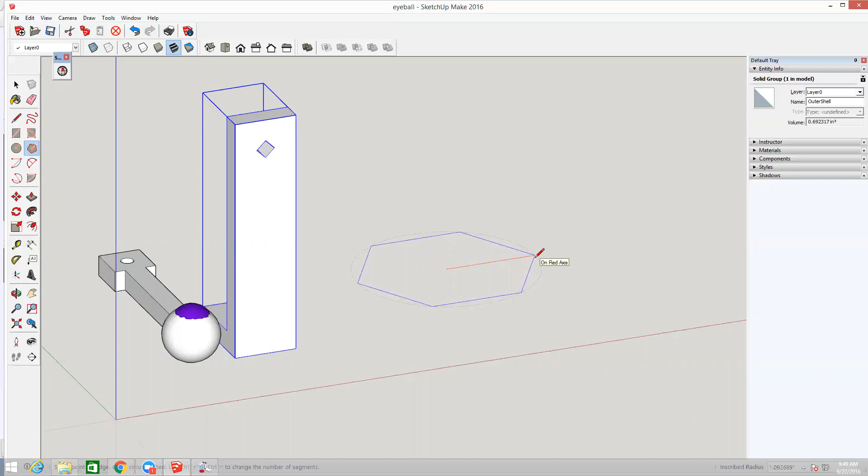And I'm going to raise it up with the push-pull tool, after I stop and let everyone get caught up again. P for push-pull tool.

And the little stub on the end of the eyeball is 1/4 of an inch high. So we're going to make this hexagon 1/4 of an inch high.

And if you're going to have this thing spinning on that shaft, we might as well make the hole right away. So I'm going to get the circle tool, type C on the keyboard to get the circle tool.

Brooks, did you give a measurement on how the radius of your... No. So that's something you'll need to do.

You want to get into that drawing for the thing that's spinning on a shaft and just see how much room you have. Measure it with the tape measure tool. And then come over here and figure out just how much room you got for this thing to rotate in.

And if you print it out and it's wrong, then you can just make a bracket that's a little taller.

Okay, so hole in the center, 0.078, and then push-pull tool.

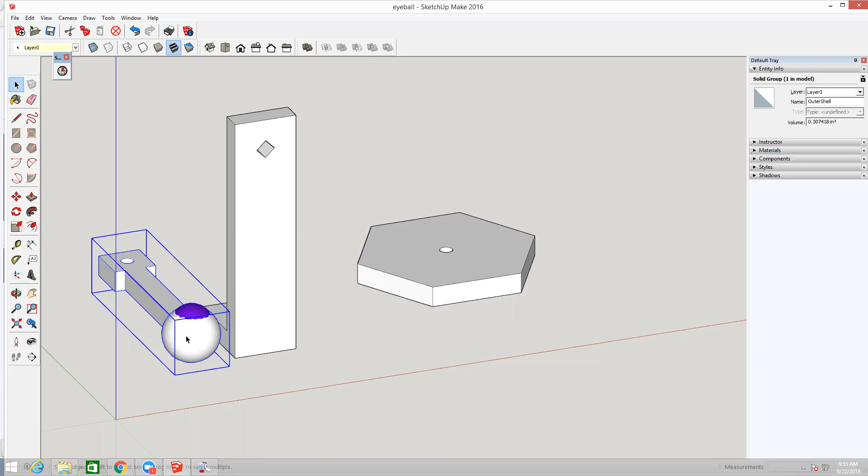So what I need to do next is download the file that has the eyeball in it. Open that file up, then copy the eyeball, and then get back into this drawing and paste it in here.

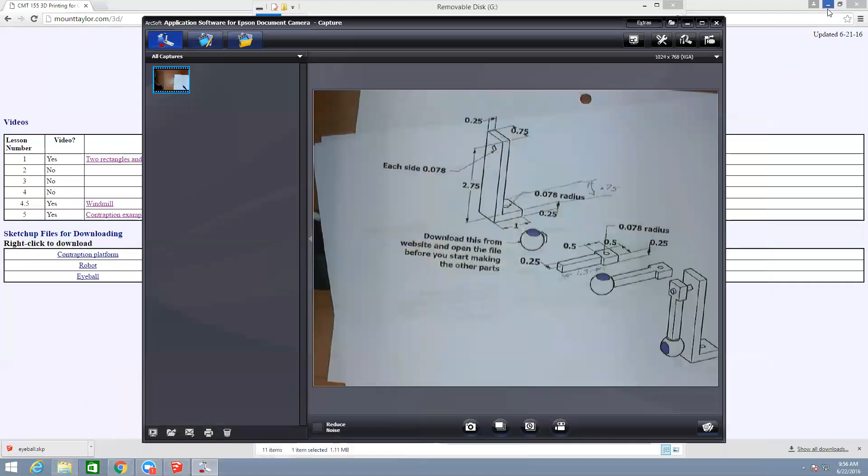So I'm going to get this out of our hair right now, and this too.

And next I'm going to click the SketchUp icon. Okay, we're opening another instance of SketchUp, so that we haven't thrown away the old drawing.

And I'm getting ahead of myself. I'll leave this open here. We are going to need this in a minute.

What I should have done was to go to the website for the eyeball. Well, you know, actually, we already have it on the removable drive, so I didn't need to go to the website.

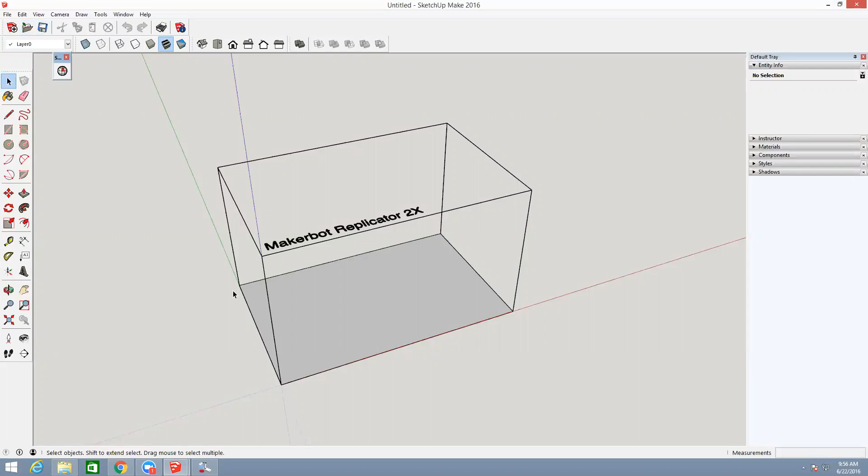I could have just gone to here and, well, let me go to the File Explorer down here. And here's the eyeball file that we downloaded earlier. I'm going to double click that, which will open it into SketchUp.

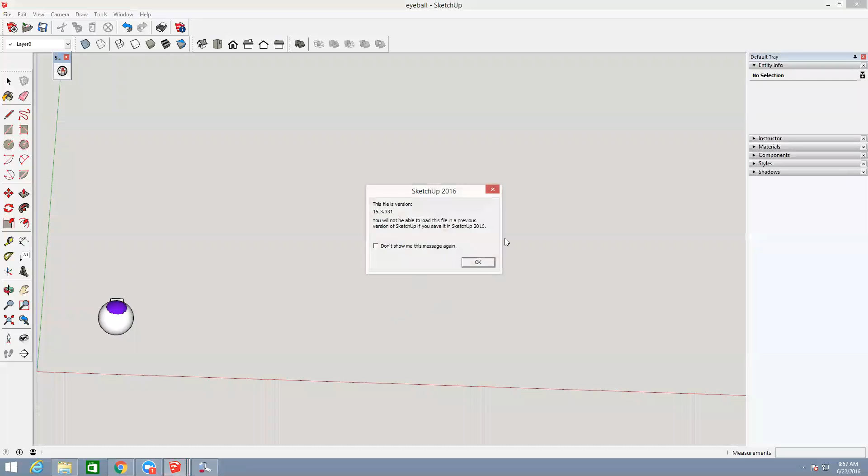Okay, now I'm going to click the eyeball, edit, copy. Notice it says Control-C over here.

It's worth remembering that Control-C does a copy, Control-V, which is right next to the letter C on the keyboard, does a paste. I also like to think that Control-V is like you're pushing your thumb down to paste the thing on.

So you can always go to edit. Sometimes some software, when you want to copy something, it doesn't have edit, but you can do a Control-C and copy it anyway. Okay, now we have a copy of that eyeball on the Windows clipboard.

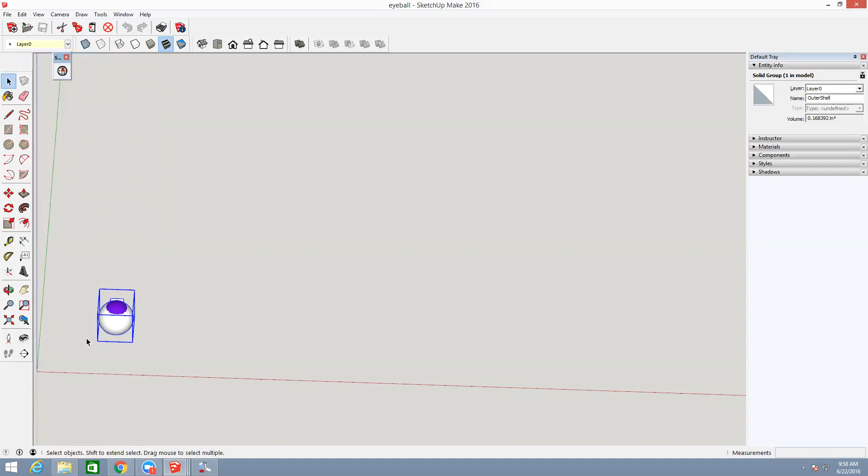And we'll get back over here to what we were doing. Now, it needs to know where to paste that eyeball when you paste it.

I'm going to draw a line, just from here, doesn't really matter. But see, this line is on the ground.

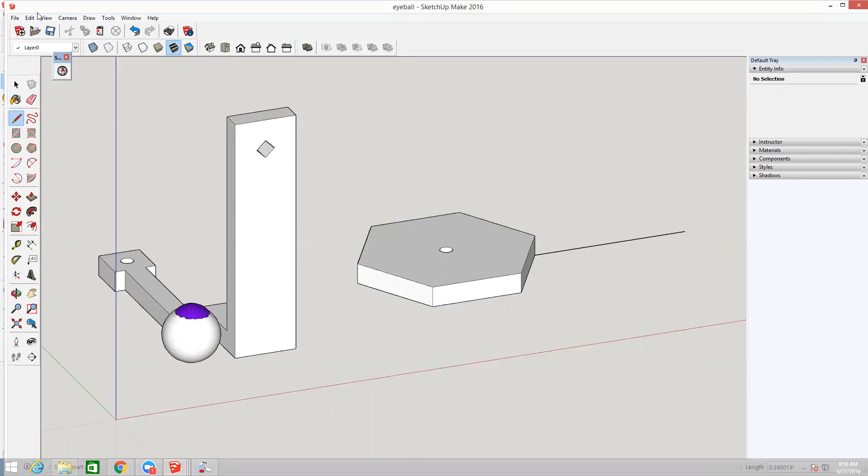Now I'm going to go up here, edit, paste, or I could have done a Control-V also. And here's our eyeball. The four arrows there, if we put those on that dot there, then it's going to kind of anchor the eyeball on the end of that line. We don't need the line anymore, so I will erase that.

Now what we need to do is make some copies of this eyeball. We'll need 6 copies. But I can tell right now that the way this eyeball is oriented, it'll fit nicely down here.

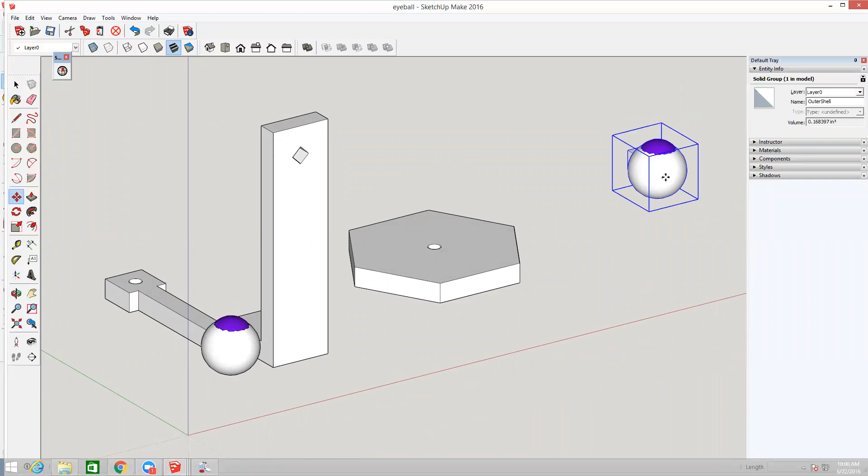So I'm going to make a copy of the eyeball. Arrow tool, click to tell it what we're going to move. Then M on the keyboard to get the move tool. Control button to tell it we want to copy. And then we have 2 eyeballs, just like any animal should have. Okay, except for Martians.

So I'm going to turn this around so I can see the midpoint on this stub right here. M for move, we'll grab the midpoint here at the top, and we'll bring this over here. We'll fish around for the...

Now we're having a hard time here when this kind of thing happens, and you can't let it glom onto this line here. You need to get the X-ray tool. With the X-ray tool, we don't have things getting in the way. We can click on things that are inside of things even.

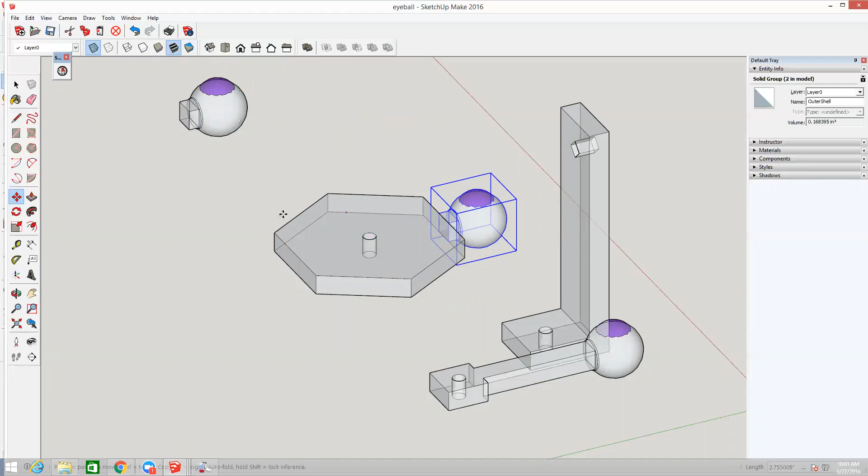So see, it kind of snaps right to that midpoint there. In fact, it even says midpoint in the group. But in X-ray mode, it gets pretty confusing. To turn off X-ray mode, you click the X-ray icon.

All right, let me rotate this. Oops, it was still in the move tool. I'm going to do an undo. I'll press O for orbit. Okay, that eyeball is glommed right on there.

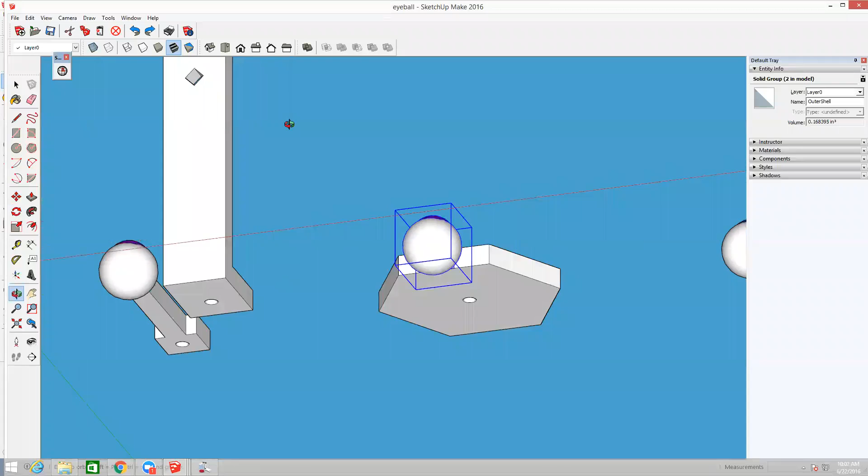Ultimately, we want to use an outer shell to make this whole thing one solid. And when we go to print this thing, the MakerBot software will automatically create supports for the hexagon.

Now let's make another copy of the eyeball. We'll glom it onto the other surface over here. So I click that eyeball with the arrow tool, M for move, Control for copy.

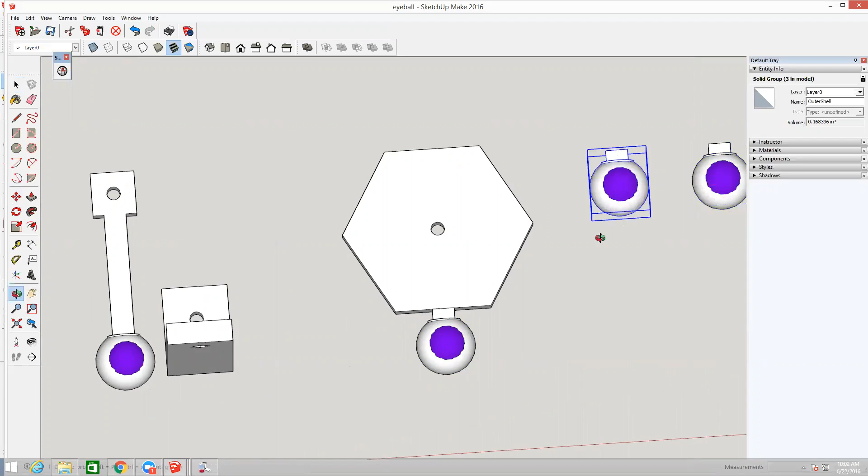And I'm going to kind of rotate things so I can see what I want to do. Okay, spacebar to get the pointer tool, the select tool.

Okay, we've got the pointer tool, and I'm going to do a right click, and I'm going to do flip along, and this is going to make a mirror image of this thing, and I'm going to guess that we want to flip it along the green axis.

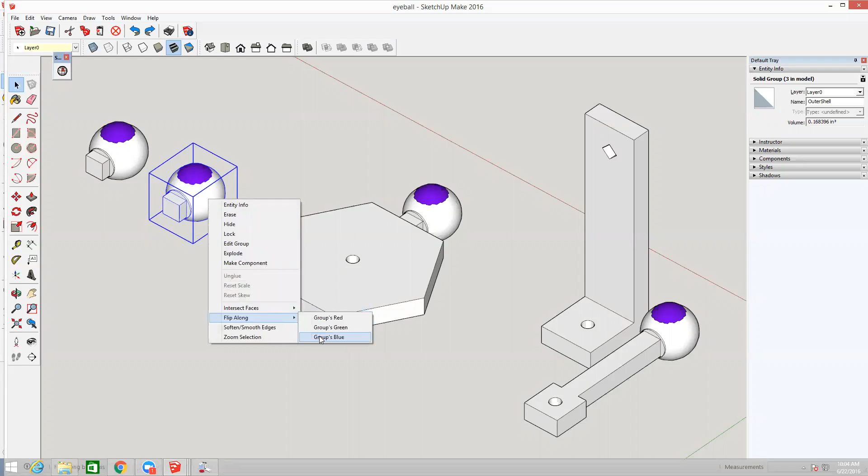If that doesn't work, we just do an undo, then flip it along some other axis. That didn't work, okay, undo. All right, I'll try flipping it along the red axis next. That didn't work either, okay. Third time's a charm, flip along the blue axis. That worked. Took me 3 tries, but I got there.

Now what we're going to do is, well, I'm going to let you get caught up with what we're going to do first. Next thing is to stick this eyeball onto the opposite side of the hexagon.

M for move. C, nope, we don't want to do control because we already have a copy. So just plain old M for move. And we'll catch the midpoint here on this top line here on the stub. And dang, we can't see where we want to put it.

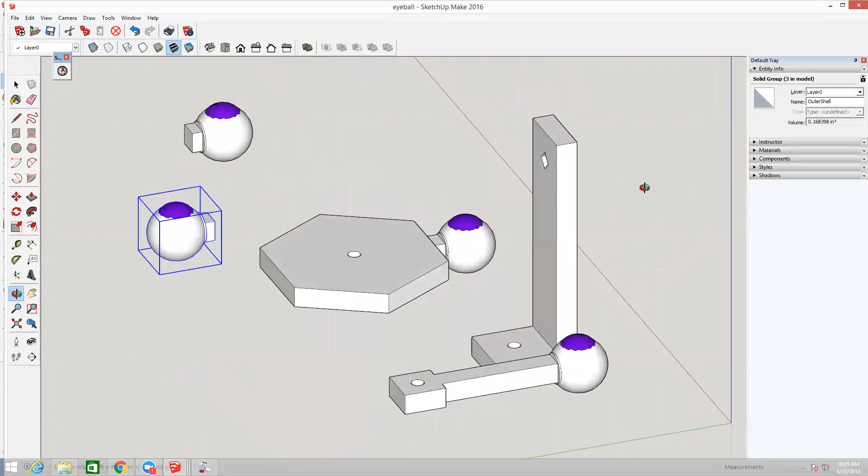Well, no problem, you press O for orbit, get things oriented the way you want to have them. And then M for move, and then we fish around for the midpoint here. We didn't have to go to X-ray mode, notice it picked up where we left off.

Okay, now these are the easy ones, we've done the easy ones. Let me pause to get you caught up. We need a copy of the eyeball, so move to, well, first we need to select it.

Okay, we need to select the eyeball over here. M for move, control for copy, and now we've got a copy of it.

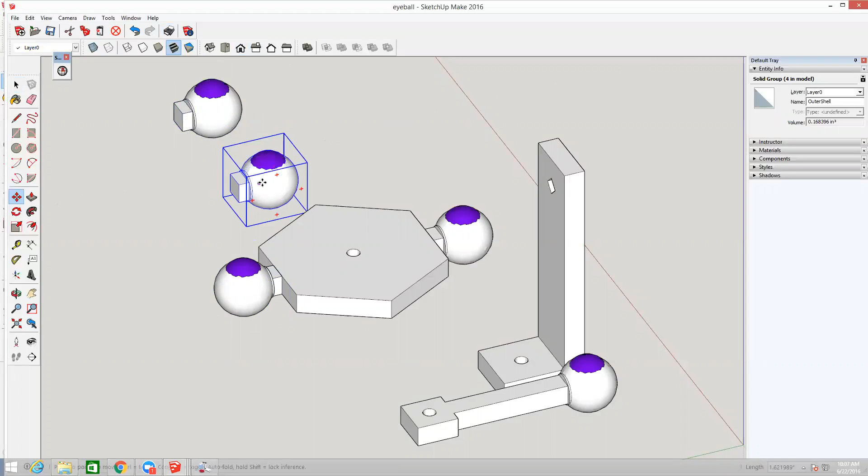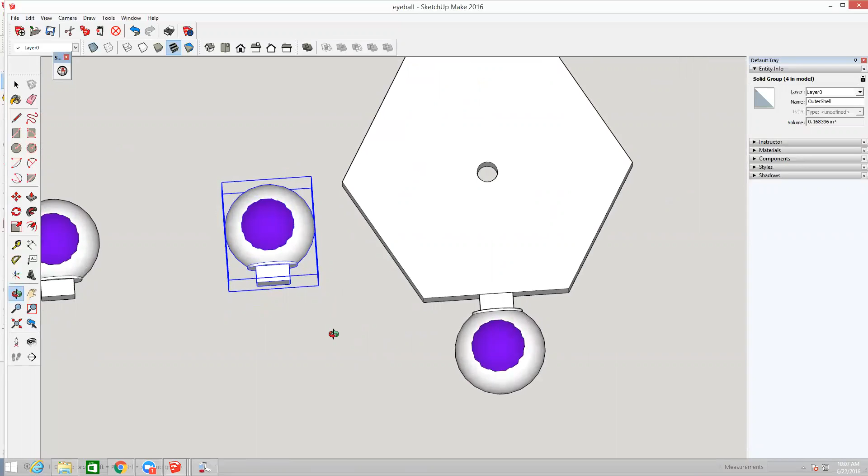Orbit tool. Now the rotate tool, we need 2 points to click on so that it knows what to rotate around. We also need to be looking down along the axis that we're going to rotate it around. So orbit tool over here—I should have been saying rotate, the rotate tool. The rotate tool needs 2 points.

Okay, click. Now you want the blue protractor, meaning you're going to rotate this around the blue axis. Okay, another click over here. I rotated it a little ways to show what direction I want to rotate it in, but let me go back the other way. I'll just guess as to where we want to rotate it to. It's giving me 120 degrees down here. That would actually work, but let's say you didn't know about that.

So I rotated this a little bit in this clockwise direction. I'm going to type in 60 for 60 degrees and press enter. I was kind of wanting to glom it onto this side, but it looks like it's just right for the other side over here. So we'll go ahead and do that.

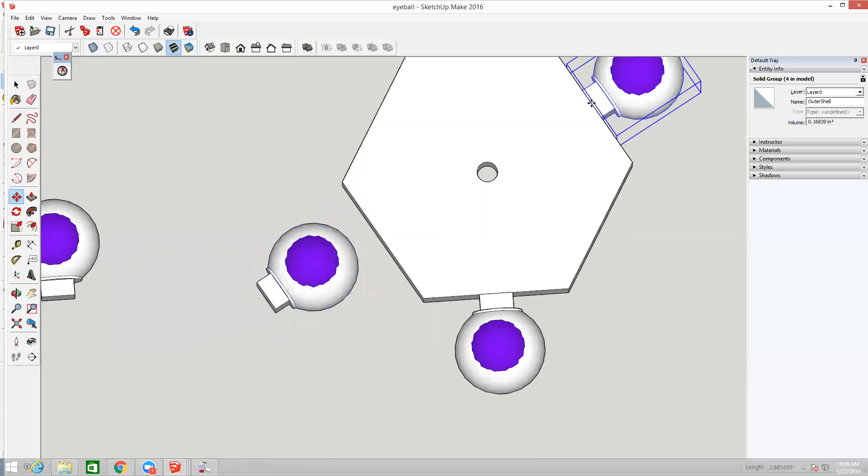I'm going to make a copy of it first because I think we'll be able to flip it and glom it onto this side over here. Okay, M for move, control for copy, the midpoint here, and then midpoint there. Okay, my first guess, 60 degrees, that was right.

And if we flip this guy over, then it'll be oriented right for this other surface. So select tool, right click to get the menu, flip along—I think blue is what we want again. Yep, blue it is. Looks like it's oriented just right.

M for move. And I grabbed hold of the midpoint, and then we get the midpoint here. It's being difficult again. So whenever you're trying to do this kind of thing, it gets difficult. You need the X-ray mode. You need Superman, X-ray vision. Now it's still giving me a hard time.

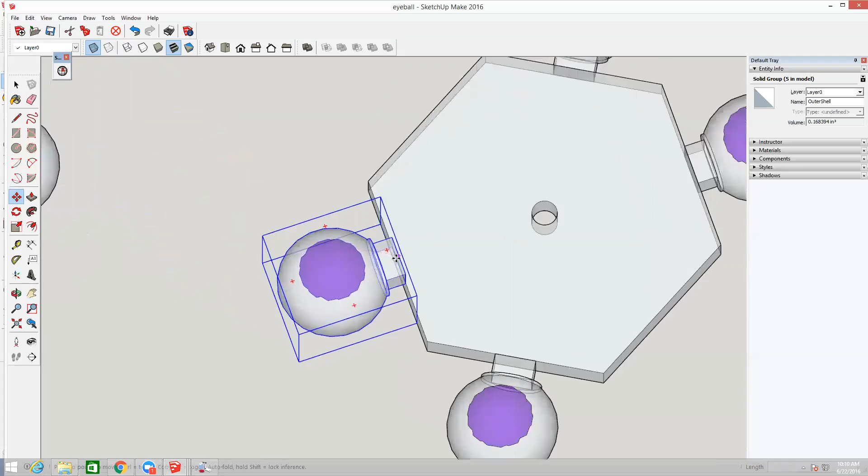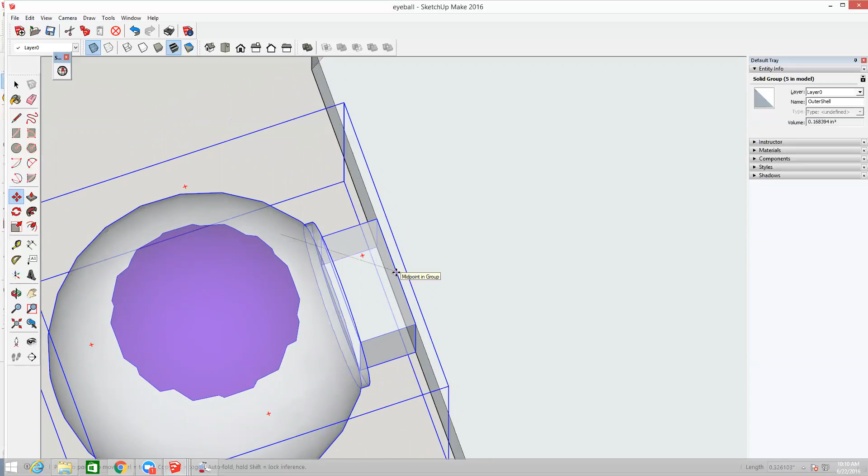So I made it bigger. Anytime you have a hard time getting it to stick where you want something to stick, you want to make the drawing bigger. SketchUp will only snap to the next thing if you're within a certain distance as it appears on the screen. So sometimes it'll snap to things you don't want, but if you make the picture bigger, it'll snap to the right thing. Now in AutoCAD, you can turn snap on and off. In SketchUp, you can't turn snap on and off. So we've snapped it to the midpoint of this other side here.

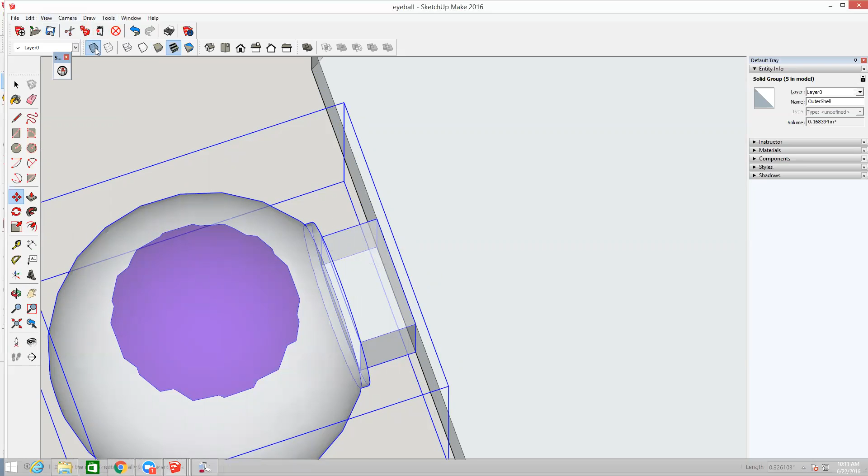All right, we'll click the X-ray icon to turn off X-ray view. So that's all I'm going to do. I'll let you figure out the eyeballs for the other side.

So I'm giving you lots of ideas for contraptions. I guess so far I've been wanting you to do all of them, but if you have an idea for something of your own concoction, you can work on that when you're caught up with the other things. Or at some point I'll tell everyone, okay, go ahead and create some kind of a contraption, spend a while coming up with something neat. So I do want everyone to do this thing also. So we've got two contraption projects.

We've got the eyeball on the pendulum, and we have the eyeball stuck onto a hexagon. Now remember, you've got to figure out how big to make the hexagon first. So you've got to open the drawing with the gizmo spinning on the axis, and then make a measurement as to how much space you have. And if you get it wrong, you can just make a bracket that's higher than what we normally have. Okay, I guess we'll stop here.